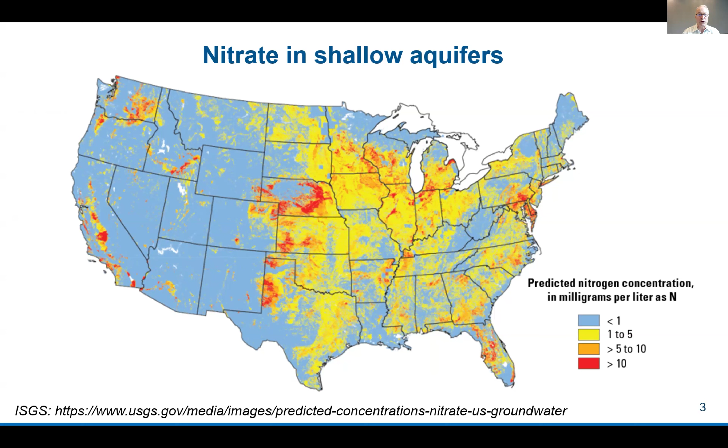All right, so we're talking about a major problem that is across the United States: nitrate contamination in shallow aquifers. Nitrate contamination is most often a result of fertilization for agricultural districts, and it is becoming recognized as a major health hazard, specifically for rural communities across the United States.

In California, we have thousands of groundwater wells. Many of our smaller communities utilize groundwater as their sole source of water, and we can see several thousand of these wells in the SAFER database that are above the MCL. When we look at small water systems with up to 50 connections or up to 20 connections, you can see the many, many hundreds that are at risk or failing right now. An interesting point when we look at the distribution, and we don't think this is unique to California, is that a lot of these small systems facing great difficulty with nitrate contamination tend to be clustered.

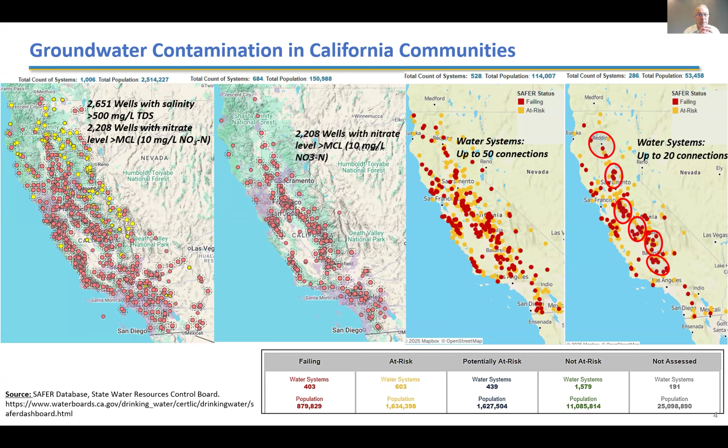And so we'll come back to that. It's a very important theme.

Next tab, Yoram. And then, of course, there is salt. Now, when Yoram made this figure, I was kind of startled to see that normally when we think about desalination and reverse osmosis, we think about taking seawater, 35 grams of salt, and converting it to fresh water. But in California, in inland California and coastal California, we have vast amounts of brackish groundwater where the salinity is too high for us to use for drinking water or for some agricultural purposes. And then look here, even the Colorado River water is 700 to 1,000 milligrams per liter. So salt is part of our water system.

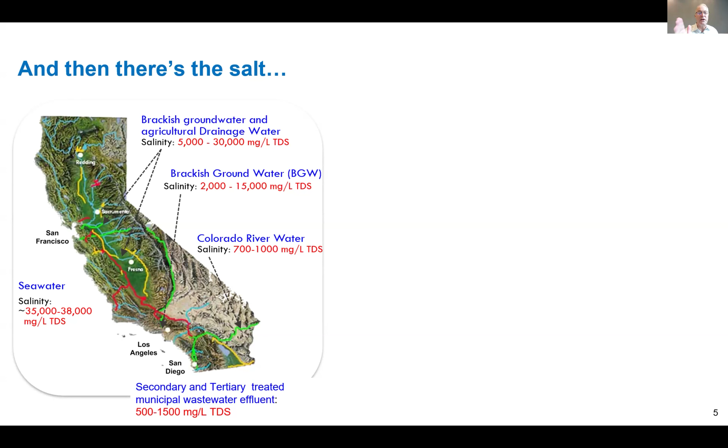And into this challenging situation comes none other than Dr. Yoram Cohen. Next. Here pictured before his appearance at the 1981 Zoot Suit riot at UCLA.

Professor Cohen has been a landmark figure in desalination across the world, and we were so delighted when he and his team approached NAWI in 2021 with a proposal to build on a project that had previously been funded by the State Water Resources Control Board under Proposition 50.

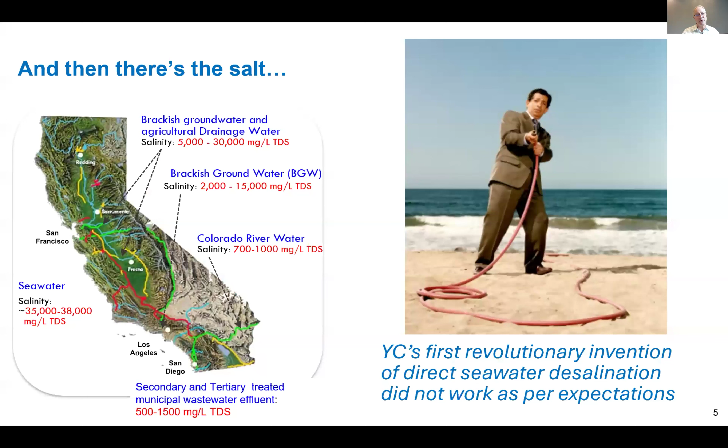Yoram, welcome to the program, and tell us, I'm going to tell a little bit more. Thank you. No, keep going.

One of the reasons why we were so eager to get this project funded was our 20th century water systems are really marvels of engineering, design, and construction. We have large-scale centralized treatment and centralized distribution, and that works great, especially for urban communities, and that's where the bulk of people live.

When we get into agricultural basins, we tend to see smaller communities, and they have a dual challenge of having smaller populations and lower economic base. So they have a difficulty in operating sometimes more advanced water treatment. And as we said before, a lot of these basins are challenged with nitrate contamination, as well as a host of other naturally occurring contaminants or other agricultural products.

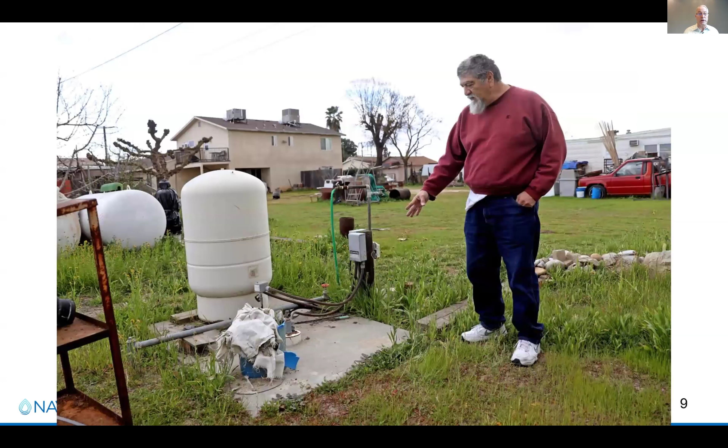The issue is particularly acute for small and very small agricultural communities, in this case, clusters of small workers clustered together. These communities are the lifeblood and the backbone of our agricultural production in California, and yet they're least well served by the current centralized water treatment systems. Their communities typically are clustered around an individual water well, often a shallow water well, and these are the sorts of wells that are most vulnerable to nitrate contamination as well as other contaminants.

And as I said, into this challenging situation came Yoram Cohen and his team.

Yoram, let's talk about small systems for a second. So walk us through this slide. Yeah. So basically, Peter, I mean, we are very well versed and used to centralized systems that serve large population, industrial centers, and also somewhat smaller satellite systems that are also, in many respects, centralized for their small population center. But on the other extreme, we have small communities that are not part of a centralized system, either water treatment or sewage treatment. And therefore, those communities kind of fall in between the cracks, and that creates a real problem. They don't have the person power, the technical ability to really take care of their own small system, or they may not even have a water treatment system in their locality.

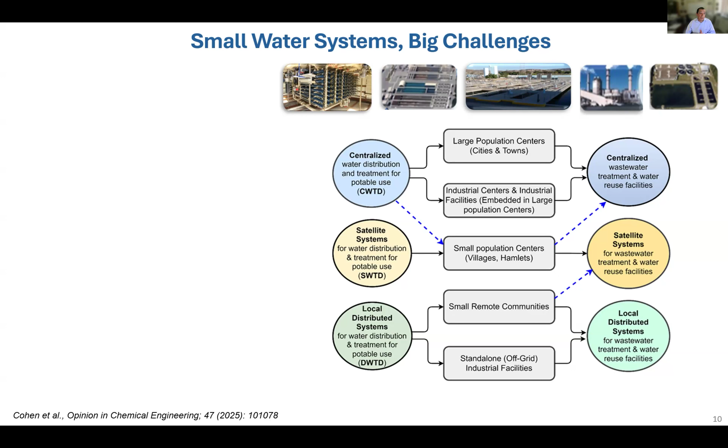So there are challenges, and the challenges for those small distributed systems would be obviously the cost. They need to meet drinking water standards for potable water, and it's important to avoid interruptions in the delivery of water. Those systems have to be able to operate 24/7, whether they operate continuously or intermittently. And therefore, there's also the issue of management of the treatment residual. If we treat this water using standard technology such as RO or NF or even ion exchange, we have to deal with residual streams. So that creates a challenge. And of course, as a result, there are also regulatory requirements and constraints that will impact the operation and the cost. So those are the challenges that we are faced with, and the important need to really help those small communities that cannot help themselves.

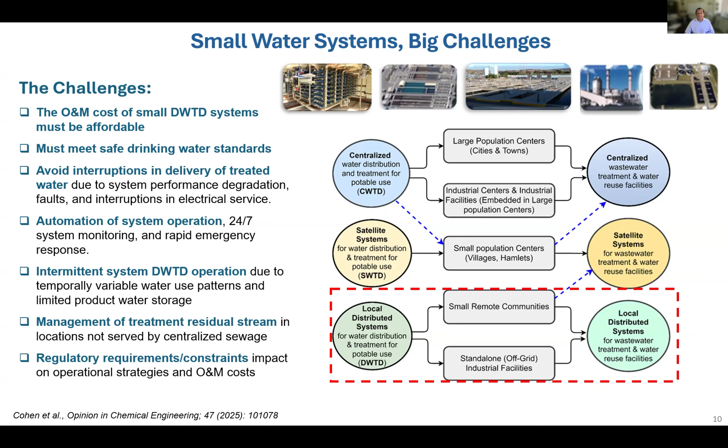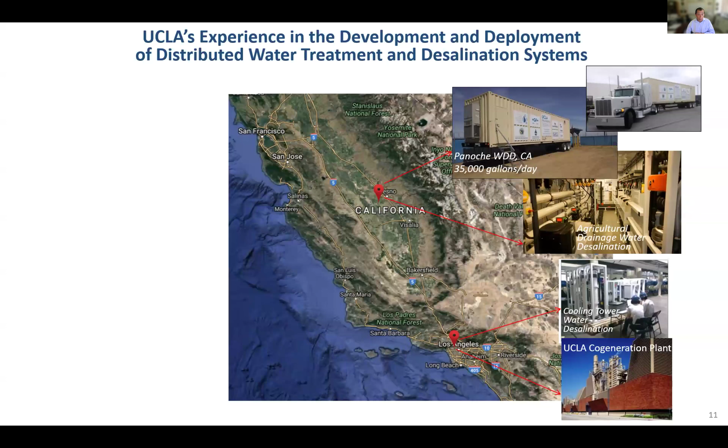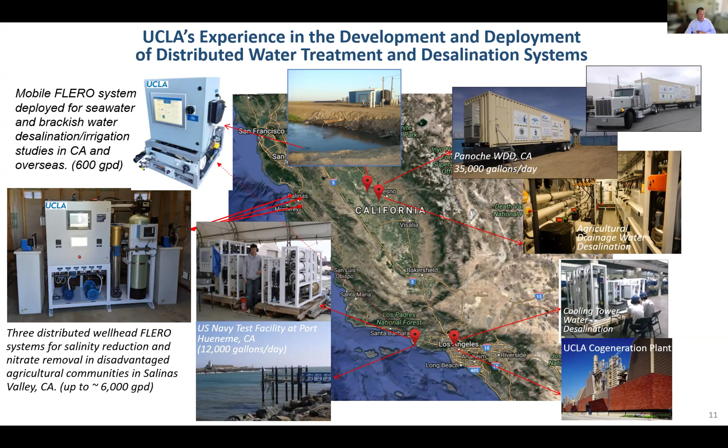So from that, the systems that I'm going to talk to you about today were born out of that experience and a lot of headaches over the years. We approached a number of communities, and I'll tell you about this story in a minute, but I thought it would be useful to show you right here.

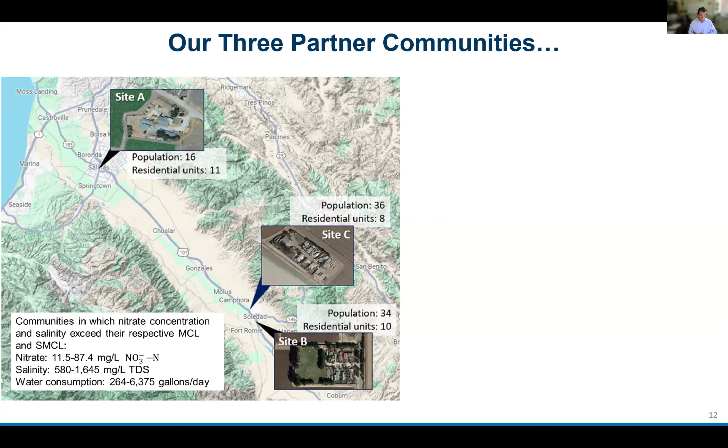Those communities that we selected for this project are between Soledad and Salinas. Fairly small communities, from 16 to 36 residents, and their water is contaminated with nitrate, in two of the communities up to about 6 to 8 times the allowable limit, and the salinity is above that of drinking water secondary MCL. Their water consumption is between 200-300 gallons per day up to about 6,000 gallons per day. So those are the things we have to work with.

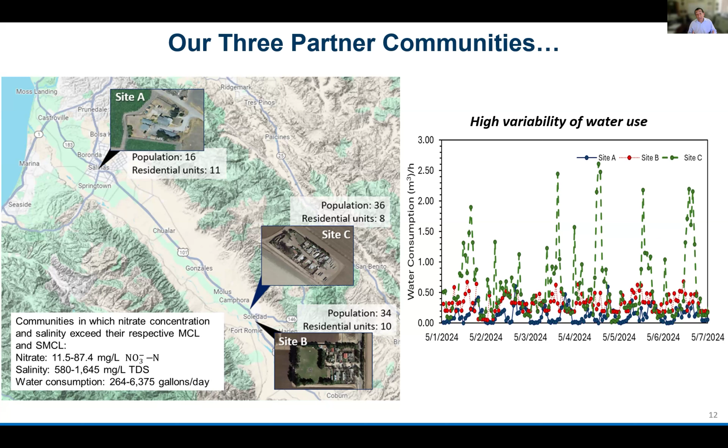One of the things to realize immediately is that water usage is temporally variable, as you can see in the plot here for 3 of the sites. So when you design a system and its operation, you have to take that into account.

With that in mind, the thought about what one would do to treat water in these communities is as follows. You have water from the well for the existing water system in those communities. It goes into a pressure tank, and from the pressure tank to the residential units, and the sanitary water from the residential units is then discharged into a septic tank.

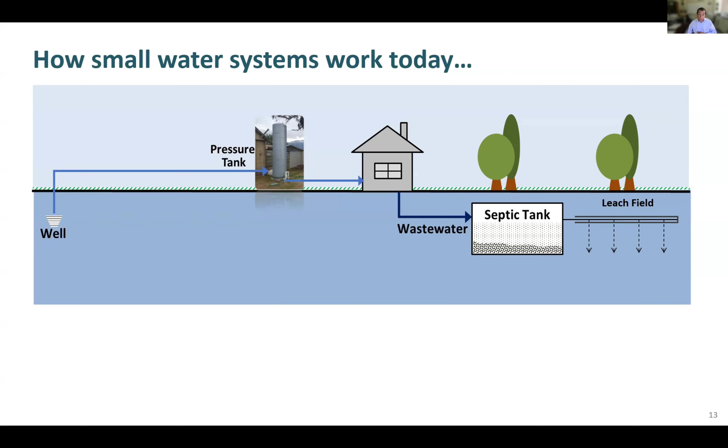In the septic tank, under anoxic conditions, nitrate that enters is denitrified to nitrogen that is then released, and the ammonium released to the leach field can then lead to formation of nitrate.

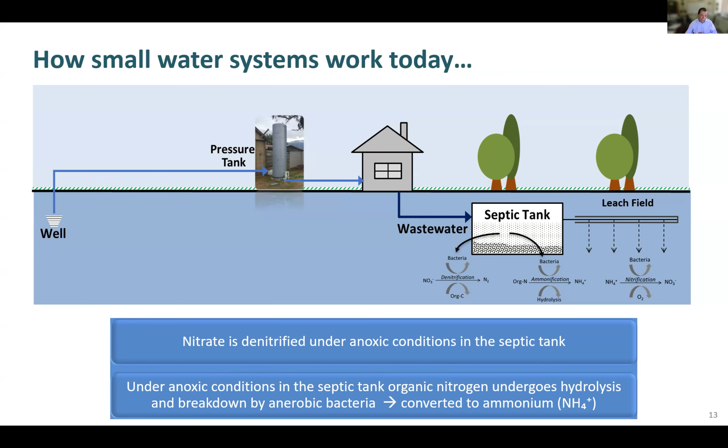So now the question is, if I have nitrate in the well and we are removing this nitrate, what happens to nitrate in the septic tank? Although there is science to indicate what I just told you, this was an important element to prove, and I will cover that as we move forward.

So the treatment approach is you put in a treatment system, in this case an RO system, between the residential units and the well. Water is treated, and the product water is then used by the community, and the concentrate will end up in the septic tank, as will the sanitary water. So basically, we're taking the raw water, splitting it into two streams, and then combining them together.

The argument here, which is important from a regulatory viewpoint, was to prove that we are not making things worse in the septic system, because the nitrate will be denitrified. So in fact, we are cleaning the water.

The fact is that all the nitrate was ending up in the wastewater in the first place. Now we're simply taking the nitrate and other contaminants and bypassing the people in the house. It's a simple but very important concept: we can take those pollutants and keep them away from people.

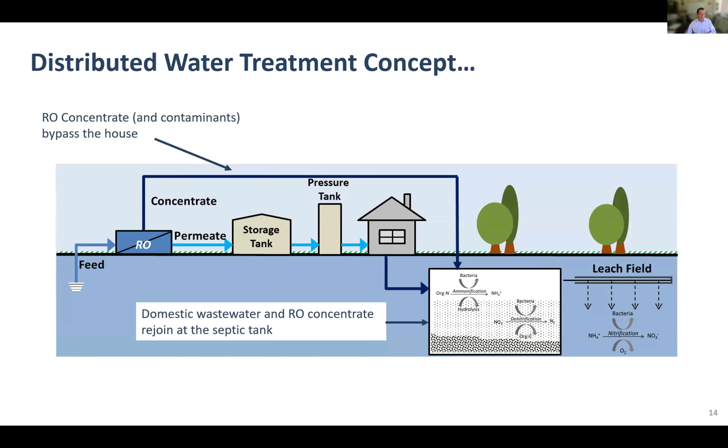And so, Peter, what we forgot to tell the audience is that this presentation will have the form of basically a podcast. That's right, you and I are going to be talking through this. So we already covered that point, and now when you work on this project and put it together, of course you have research questions.

The important research question is: can small scale systems provide safe and affordable water? And how will they be managed, maintained, and operated? Is the technology good enough? What is the actual capital cost and operating costs? Therefore, is it a viable or affordable solution appropriate for small communities in California?

Based on this question, the project goals were to start with a single system, expand it to 3 systems, and that's where the involvement with NAWI came into play, as to how do we expand it to 3 systems and then manage them as a network, get the actual cost involved, and refine strategies for increasing system reliability, remote monitoring, and develop soft sensors that are really critical here, which we'll cover in a few minutes.

And of course, ask the question, or try to answer the question: is it feasible to expand the automation and cyberinfrastructure for these systems to let it grow to a much larger network of systems, or as we call it, a virtual water district?

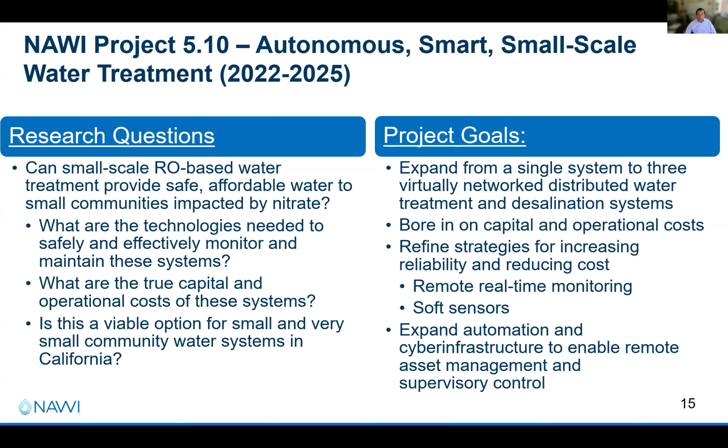What I should say is, when we started with this project, we did not have AI, we did not have the level of cloud services that we have today. So things have obviously evolved over time.

What's important in the project is to work with project stakeholders: the property owners, the residents, state and county, the various water boards, even the building departments in the county, and various representatives, and to work with non-profit organizations, including arranging for replacement water for the communities while the project was still building, and to work with other groups in order to communicate with the residents and to build trust. And of course, it wouldn't be possible without the support of NAWI, the Department of Water Resources, and all the students, the postdocs, and the contractors that worked with us over the years.

And last but not least, the Lawrence Berkeley National Laboratory, which has made a major contribution in assessing not just the life cycle analysis, but the potential impact of such a system on emission of greenhouse gases, and how we can reduce energy or electricity costs.

So community outreach is critical. I won't belabor that point, but we've been at it from the very early stages of the project, selecting the communities. We toured the entire region and talked to many different communities to identify those willing to work with us, but also those where we could answer their questions and build trust.

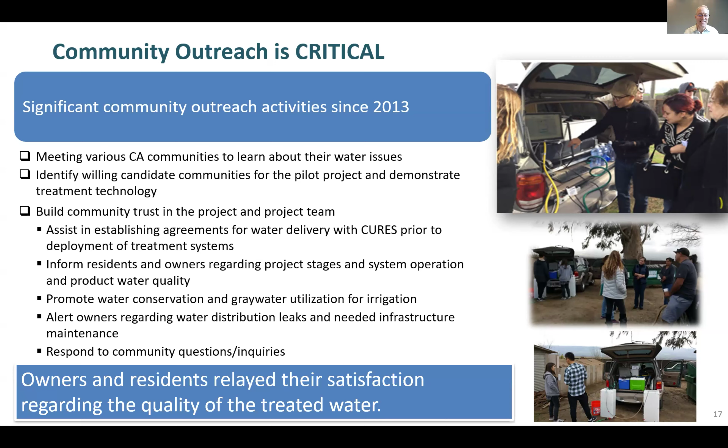The major element of the project is to install, operate, and of course measure on all aspects. This was key, and we will talk about that.

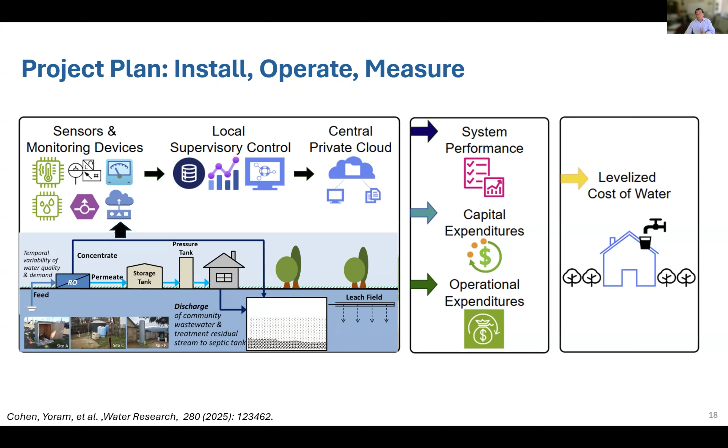The main component is to do the technological work, develop the system, deploy it, have all the sensors, controls, and the central private cloud for monitoring those systems, to get all the information we need in order to determine the capital and operational expenditures, so that we can arrive at the levelized cost of water.

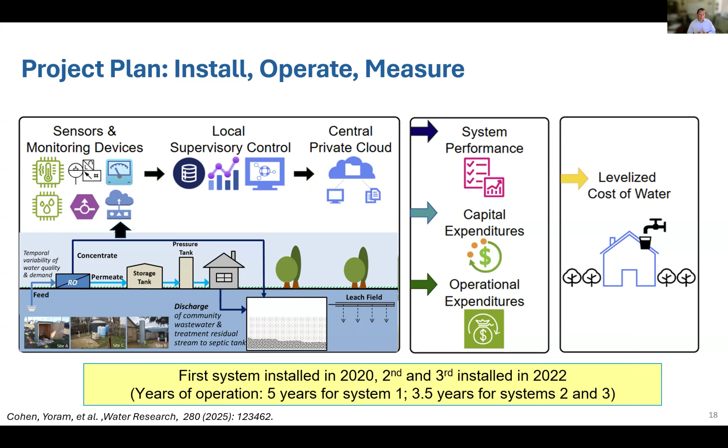Just to remind you, the first system we installed was in 2020, the second and third in 2022. So systems have been operated for about 3.5, now almost 4 years, 4 to 5 years, which is a significant period.

I know everybody is gung-ho on learning about water treatment, but before you can do water treatment, you have to make sure the site infrastructure is properly done. Those of you who have built your own homes would know what is involved.

Since I've had experience building multiple homes over the years, I thought no problem, it'll be easy to do, without realizing that the regulatory aspects in that part of California were going to be a big headache. But we were able to do that.

You can see the work done on site: the piping, the trenching, and all the storage tanks. One important thing is that we installed a septic tank sampling basin in order to prove that there is denitrification ongoing in the septic tanks. And that had very important implications that you will hear about shortly.

So I already mentioned there was site investigation, community engagement, getting all the appropriate permits, and of course designing the system layout, all the electrical, the plumbing, and working with the contractors to do that. And ultimately, once that is done, then you can install the treatment.

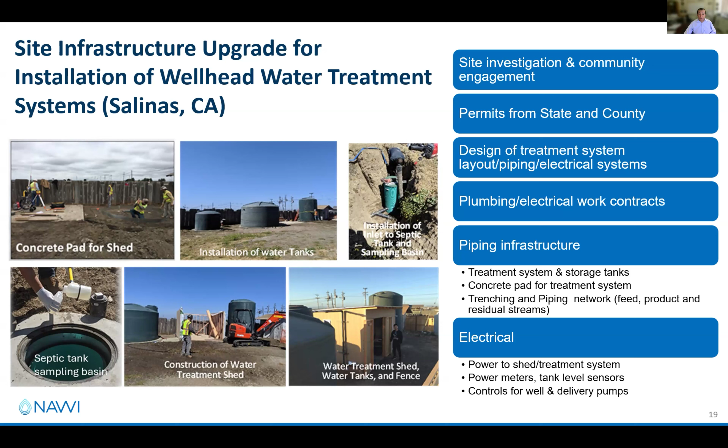Let me emphasize here, this is one of the important aspects of this project: UCLA did or oversaw all these works. So UCLA had all the receipts, which meant we could do a very accurate capital cost. Our analysis doesn't just include the cost of the parts, it includes all the aspects of siting, installation, etcetera. That is important, especially approaching a new community, to be able to inform them as to what would be involved and what the cost would be.

So now we're getting into the actual treatment system. I'll show you a simplified view of it. Basically what happens is we take water from the well into a feed tank, then into the treatment system, the RO. However, what we have is a recycle of the concentrate in that system, and of course the concentrate portion will be discharged to a septic tank.

What I'm not showing you here is that only water that meets the regulatory limit is diverted into the product water tank that you see here. Once it's in the product water tank, another part of the system, which we also have to take care of in terms of all the controls, is delivering water to the community when needed.

They use a pressure tank — those are bladder tanks — in order to build the pressure to deliver the water to the distribution system. So once there is a need, once the pressure is at a given level or below a given level, then the delivery pump would push water into those tanks.

Beyond the RO system, you also have to take care of and satisfy all the regular requirements for drinking water in California — adequate chlorination and holding a residual disinfectant. You also test to make sure you're not liberating copper or any lead from the system, following essentially all the regulatory requirements of a public drinking water system, in addition to bacterial tests to ensure the water is safe.

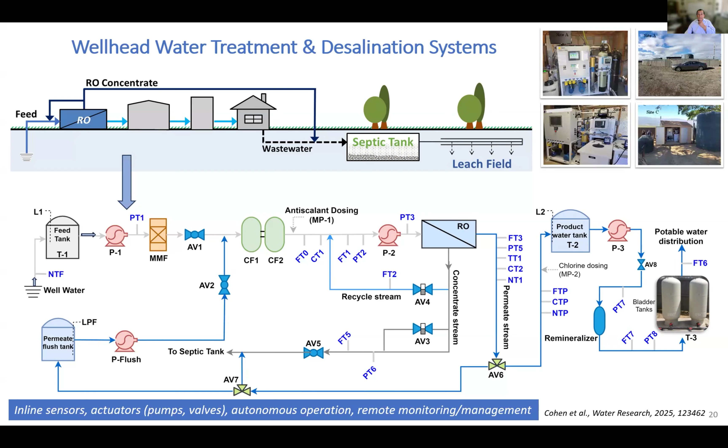Now let's move forward and say the system is completely instrumented. There are roughly about 33 sensors in that system, and when we look at the operation of the system, those are the different sensors for conductivity, temperature, flow rate, pressure. This becomes very important when you look at the distribution. It's normalized here because, as I'll show you later, we use one system to learn about the operation and then apply it to another system.

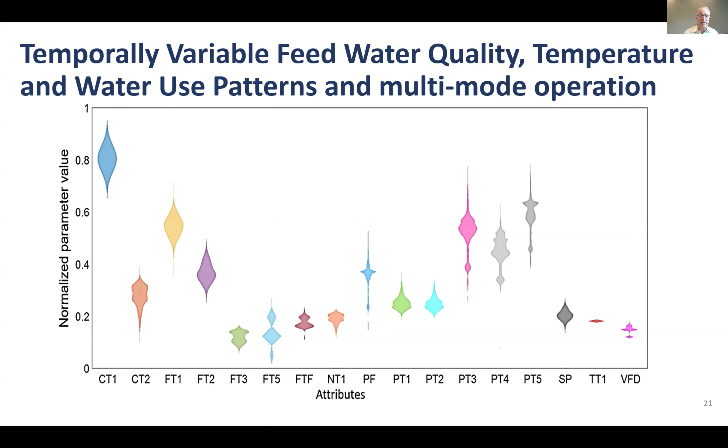Let me point out, this diagram shows the range of each of these parameters. It shows that these small systems actually experience much wider ranges in a lot of these operational parameters as the water's going through the treatment train. That's critical to understand as we develop the platform technology.

Very quickly, this is just a screenshot of the web dashboard for one of the systems, so we can actually look at the system in real time. If we click on any one of those sensors, we can see the current and the history — in this case the nitrate level, or if we look at the permeate flow rate, then we can get the history here. You can see there are breaks in here because the system operation is intermittent.

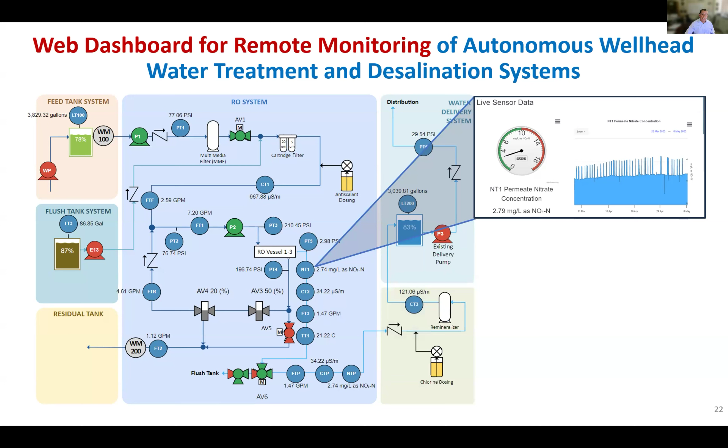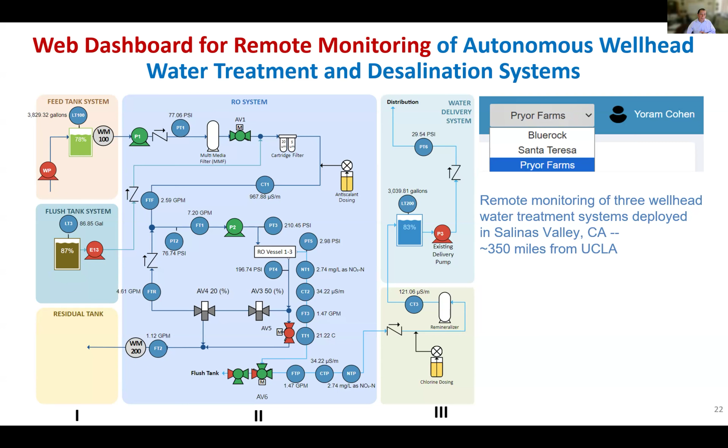But what I want you to see here is that when I talk about a treatment system, it's actually three components: there is the entire feed system, cleaning the system through flushing with permeate, but there is also the distribution system and the post-treatment of the produced water. Chlorination was mentioned, but there's also remineralization in order to stabilize the pH and put calcium back into the system. So we can not only operate the systems individually, but also look at them collectively via a web dashboard.

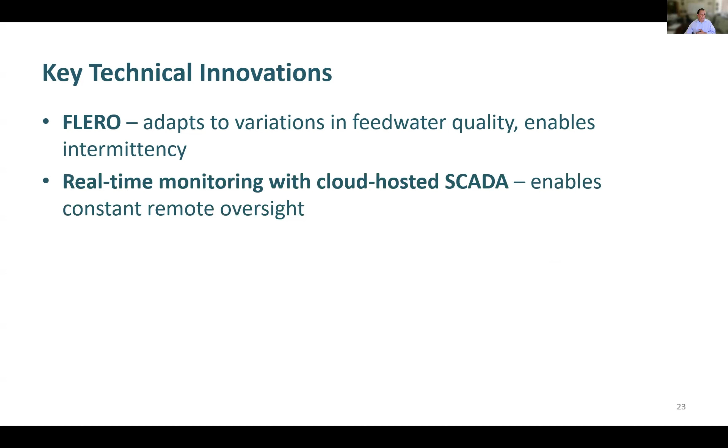So the main technical elements here, which I will cover: the FLERO system, which is the actual RO-based system; the monitoring, which I've already described; nitrate passage analysis; and sensor development. I will mention that briefly.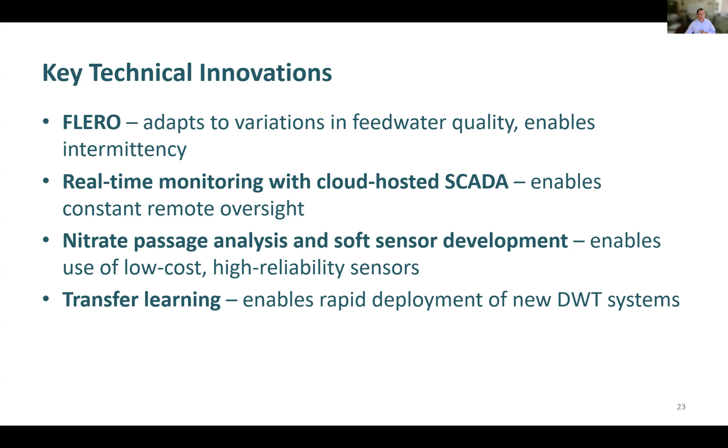And of course, transfer learning, which was really important for rapid deployment and shortening the commissioning periods.

So the FLERO system, flexible RO. Basically, the idea a number of years back, before we started with this project, was how can we reduce the size of a system and still allow us to have a very high level of flexibility in terms of covering a wide range of recovery.

In this particular system, the concentrate is recycled back to the feed. When we want to reduce energy consumption and also reduce the ratings for the feed pump, one can insert a pressure intensifier, which transfers pressure energy back into the feed and depressurizes the concentrate, which then feeds into the feed side of the pump. And that gives tremendous flexibility in terms of system operation.

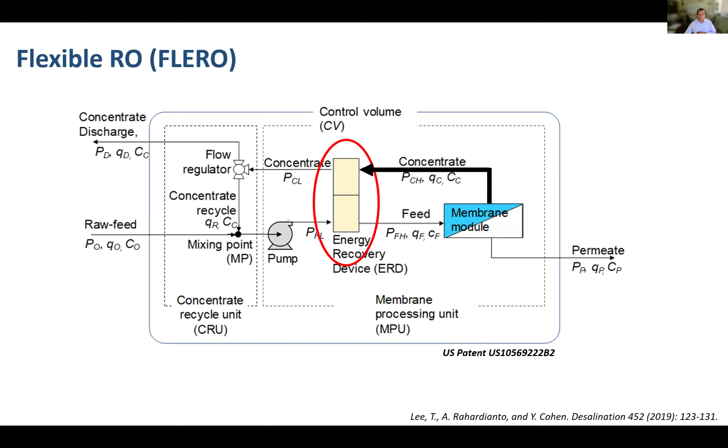As a result of that, I'll try to go through this quickly: the system overall recovery is just the single pass recovery times 1 plus the recycle ratio. In this particular case, we can operate whereby the normalized feed to the elements is essentially the same, a normalized value of 1. Then we have the concentrate, and we can vary the recycle flow in the system by readjusting the recycle flow.

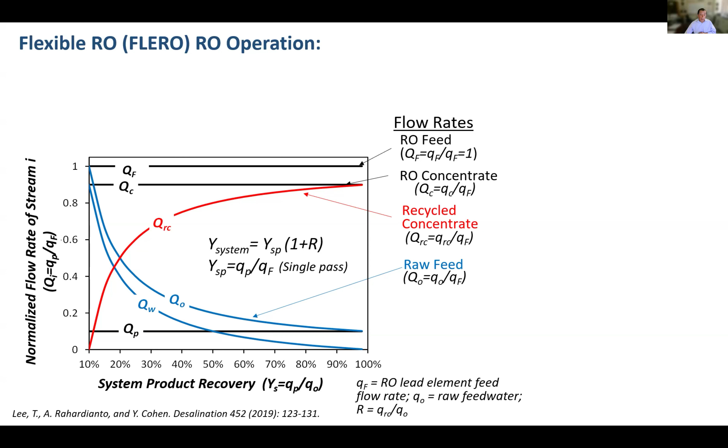We can therefore also see that the raw feed can be adjusted, and the permeate productivity can be maintained. Here I'm showing you going all the way to 100. Of course, this isn't feasible because of issues like buildup of osmotic pressure and mineral scaling, but the point is that with this system, you can operate over a very wide range of salinities, here shown for just one system, going all the way from seawater to very low brackish water.

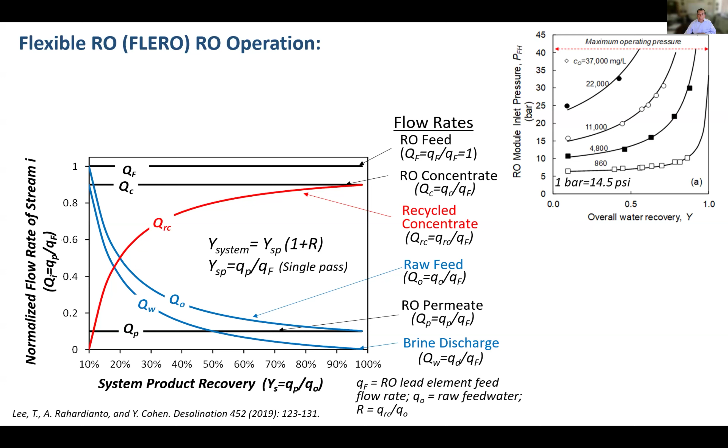The key is that whatever the inlet pressure required for the elements, we can utilize a pump of much lower pressure. So in this case, you're seeing 30 plus bar pressure needed for the RO elements, and that can be achieved with a pump that delivers only about 6 bar pump pressure.

Let's talk about this a second, Yoram. So the key element and key benefit of the FLERO architecture is you can use one standard platform and address a wide range of incoming water quality, and you can also adjust, like a throttle, the production rate by the fraction that you recycle in the system. And as you said, with the small energy recovery device, you can use relatively low cost, low pressure pumps, and yet pressurize the concentrate and boost it. So it really means you can use one standard package and apply it in a bunch of different environments.

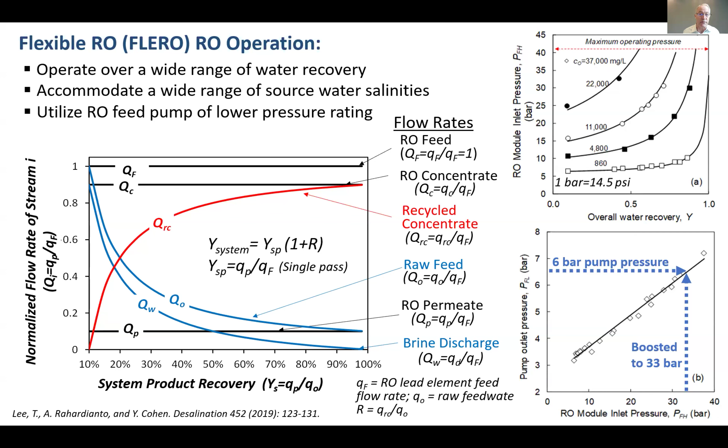That's really key. True, and it's also important, Peter, to realize that those communities may grow or decrease in size over time, so their water consumption may change as well, and water quality may change. So all of that becomes relevant.

And in fact, Yoram, you have some of these communities that are very seasonal, so you might have only a handful of occupants during some of the year, and it might swell. These are some of the practical challenges when you get to small systems with a relatively small number of households - you can't average it over a large number of households.

Anyhow, for those of you that like complicated figures, there's one on the left. I'm not going to go through it, but basically this is a pictorial representation of the overall cyber infrastructure for the systems. The main point I wanted to make is that in terms of operations, we've delivered about 7 million gallons of safe potable water to date.

And those systems have provided an incredible amount of data - roughly about 90 million data samples, each consisting of 33 input sensors and process tags, which translates to over 3 billion data points.

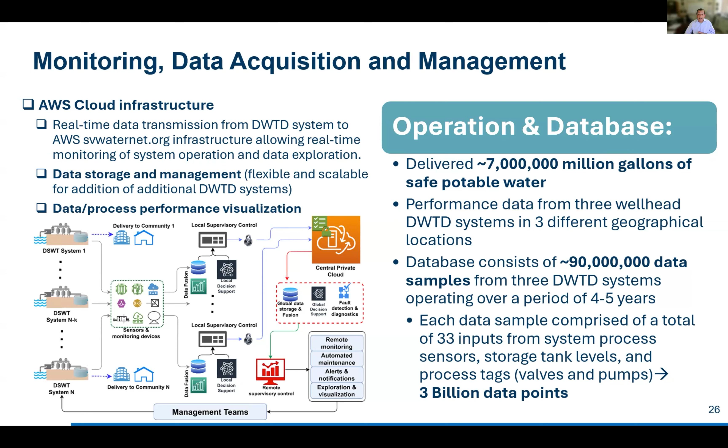It becomes critical, absolutely. So we get data every 2 to 5 seconds from the system. Now, this is important when you're developing models to describe those systems and to provide soft sensors.

Let me just stop you right there, because I know we have technical and non-technical people watching. In order for these systems to work, you also have to build a computer model that predicts how the system performs, because then you could always compare your actual numbers to what the computer is predicting.

But in order to build that computer model, you need a large volume of data, and that's what we've developed here. Also, Yoram, explain about the 4 modes in which this system operates.

Because I showed you at the beginning that the water use pattern is variable, the treatment system does not work continuously. Also, you have constrained storage. So if we have a storage of about 5,000 gallons, once it's full, the system has to stop. And so there are modes where the system may be shut down, and for various reasons, we don't let it work more than 10 hours. When it works for 10 hours, we shut it down, we flush it, and then start again.

So there is a shutdown, a permeate flush, and then a startup when the system has to start, and then you get to production. Other than production, all those periods are short, but very important, because you don't want to basically deliver water that doesn't meet the regulatory standards during any one of those periods. In other words, during startup or shutdown, you don't want to squirt a little untreated water through the system.

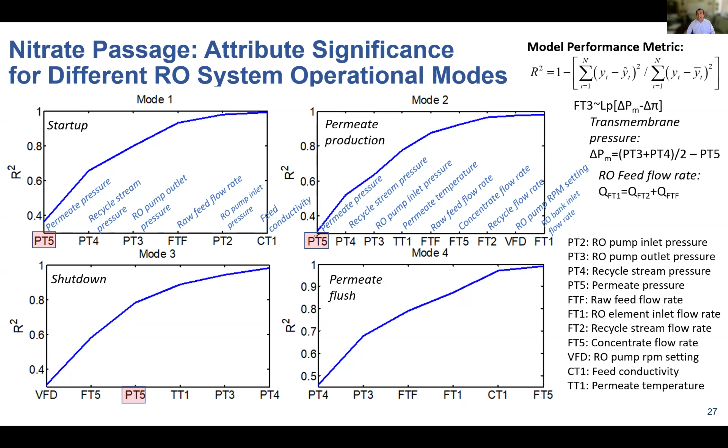Here you see some of the variables — pressures at different points, flow rates, conductivity — for the startup, and then for the second mode, which is permeate production. You see there are a few more variables there, and that the different modes share some of the same variables, but they're slightly different. For those of you interested, I'll be happy to talk more about the mechanistic reasons for all of this.

When you look at the system, there is a system startup, which is fairly short — about 90 seconds. Then there is a production period, operating for about 8 hours or so. Then there is a shutdown period, about 1 minute to shut down, and then the flushing period.

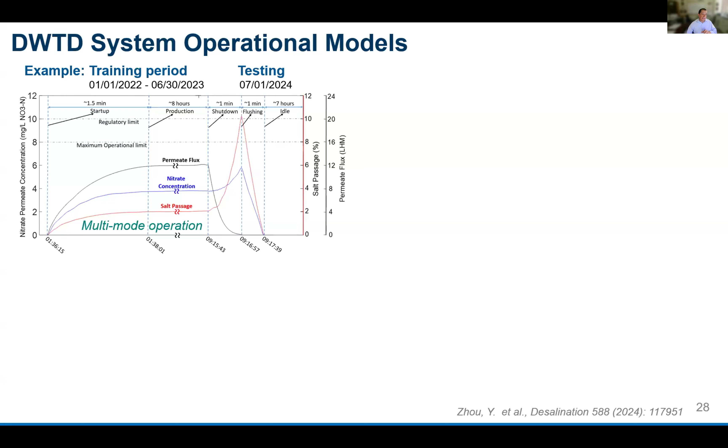Those periods can change slightly because we monitor the quality of the water during startup, and we only go into production once the water quality is met, so there can be slight variations. But one of the things you see here is that during shutdown, there is a spike — at the beginning, there's a spike in the salt concentration and a spike in the nitrate level.

In fact, over many cycles, as I'm showing on the right — predicted versus observed — what I want you to see is that there are spikes in the nitrate level that approach, and in some cases actually overshoot, the regulatory limit. So the regulators have asked us to set 8 milligrams per liter of nitrate as the operational limit, even though the actual regulatory limit is 10.

Why? For safety. And so that becomes important. So what happens during those periods of spike where the product water is above that 8 milligrams per liter?

That's a good question. During that period, the water is basically diverted into the septic system. It's just for a minute or less — a very small portion of time that the water gets shunted over there. In our experience, it can sometimes go up to 3 minutes, depending on the situation. So that is important.

Also, why is it that we need to model? It's because we want to know what is the longest period to expect for the startup and for the shutdown, so that in the event a sensor fails, we will use a conservative approach.

Now, at the bottom, you see basically what are predictions of the observed versus — for all of you who are not nerds in the audience, when you see that diagonal line, that shows you that the prediction and the actual reality are highly correlated, and that R squared, for those who don't remember statistics, shows you the degree to which the two are matching.

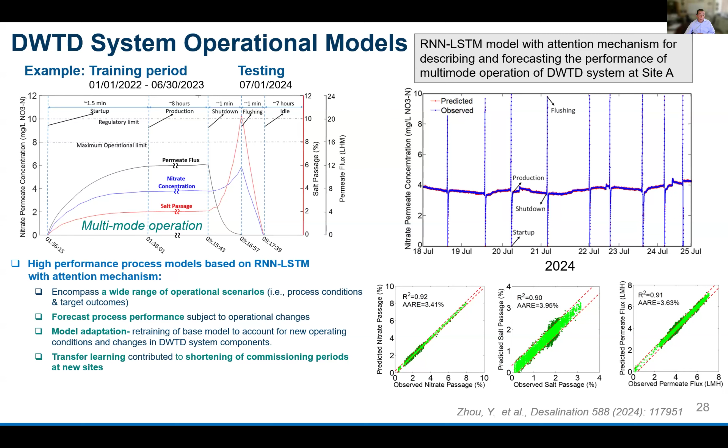Now, of course, when we do that, we have to realize that we have multiple systems. So you build a model, you've calibrated the model at one site. The next innovation is about how do we take that model and adapt it to the next site down the road. This is critical.

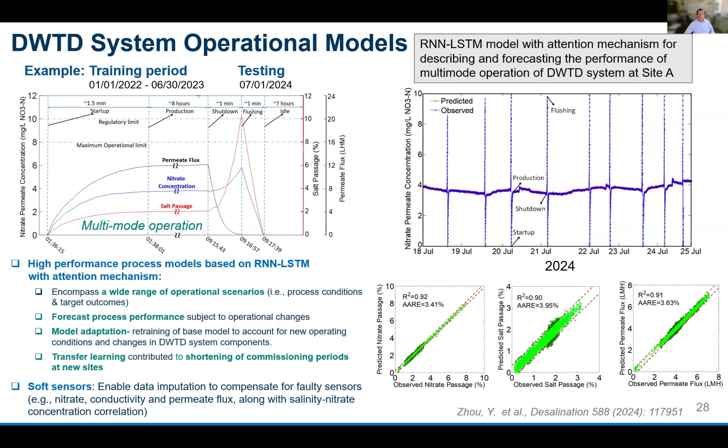Now, you may ask, why would you even want to do that? Well, our initial commissioning period was about 6 months, maybe a little bit longer, with all this testing and sampling and more testing and more sampling. And that is very tedious, but also very costly. So we thought, is there a way to accelerate this process?

If we can show that we can forecast system behavior, and that our forecast meets reality - this is why this is so important. If you built a new system from scratch with a different design, you'd have to go through that all over again. But when you use the same standard platform, you could take the knowledge set built on one site and move right down the road to the next site and get up and running.

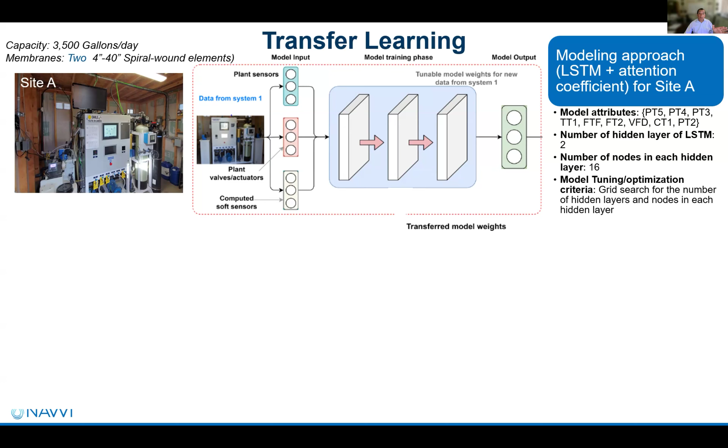So here, basically, this is one site. Site A actually is in Salinas, and then we develop a model, and then what we would like to do is transfer this model to a site near Soledad. The difference between the systems is slightly different in capacity - one had 2 spiral wound elements, the other had 3 spiral wound elements.

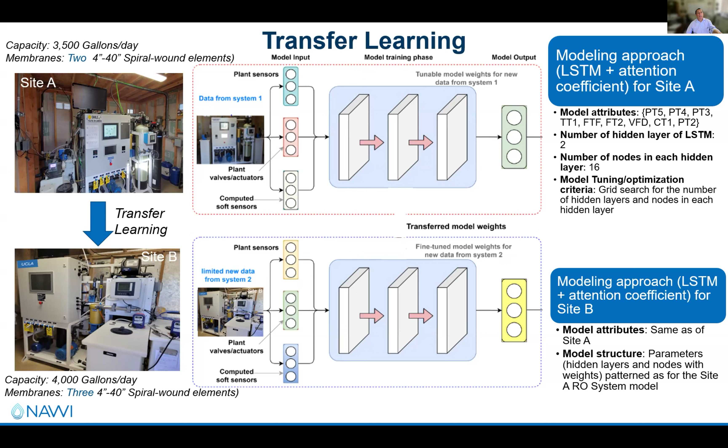So we go through this transfer learning, and basically what it means is that we take about a week or 2 weeks of data from the new site, and we use that to slightly tune the model that already exists from the first site. So what I'm going to show you here is that when we do that - now I'm looking at site B, adding a third site - we start with the initial model forecasting, and you see the R squared of about 0.94.

This is also for nitrate, but you see that we have a decline in the model accuracy. If we don't retrain, model accuracy begins to deteriorate over time. So we're going here for quite a long period, about 365 days - a full year.

So what do we do? We set a threshold that says we will not allow utilizing the model below a certain level of performance, and then we retrain. When that level of performance declines, we retrain again. Roughly, not just from this example but overall, we would have to retrain every 50 to 100 days, which you can think about as a recalibration of the soft sensors.

So in other words, physical sensors have to be recalibrated with standard solutions. Soft sensors, these data models, need to be periodically recalibrated as they drift away from the initial conditions. Yeah, makes perfect sense.

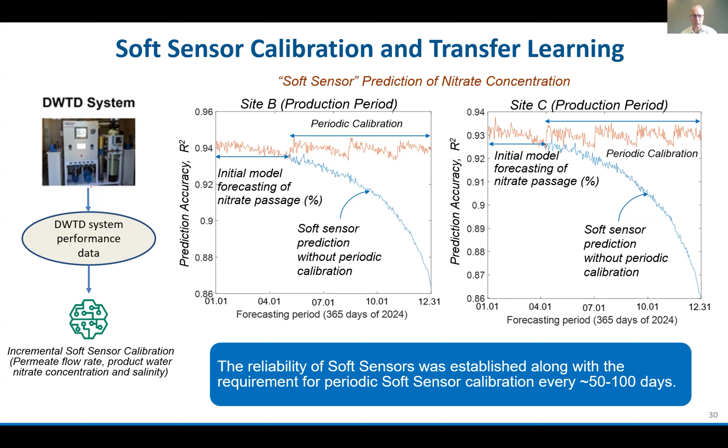And if you ask why do you need to retrain if it's the same system, remember what I showed you at the beginning about the data distribution - it's because if we transfer the model based on data that is, say, at the beginning of the fall, then by the time we get to winter, conditions change, temperature changes, the rate at which people are using water changes, water quality may change. So that's why you have to keep that going.

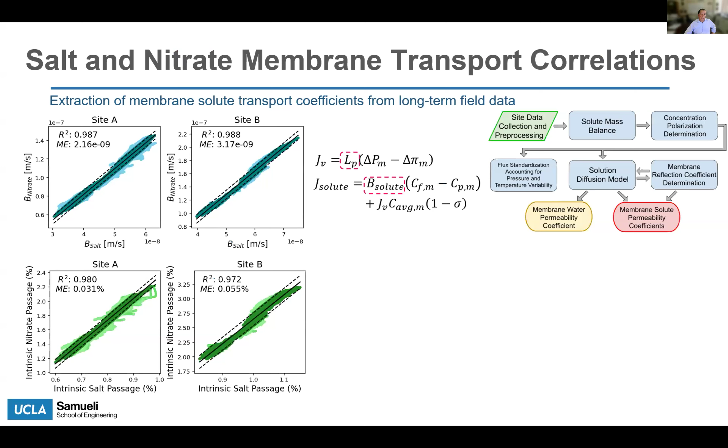So yeah, let's keep going. I know we've got 15 minutes before. Okay, with that in mind, I'm going to basically jump - a lot of technical work went into building what we call a soft sensor, a way of accurately predicting nitrate passage.

So you can see here the key element is that when you have soft sensors, it allows you to do multiple things. One is you can correlate, for example, nitrate versus salinity. So if one sensor fails to work, you can use the other in order to fill in the missing data, or to infer - if the predictions show you that the actual measurements are way off, then you can use that for fault detection.

But there is another important element to this: cost. A nitrate sensor is very expensive, on the order of $10,000 to $15,000 depending on the type. And guess what, they don't work that well either. You have to recalibrate them.

So then you have a conductivity sensor, which is much cheaper. Conductivity sensors are dead reliable. They're a much simpler device, much longer performing. So you're basically using a robust, reliable, simple sensor to infer the performance of something that's hard to measure. A nitrate sensor could be 15 to 20% of the actual water treatment cost, excluding site infrastructure.

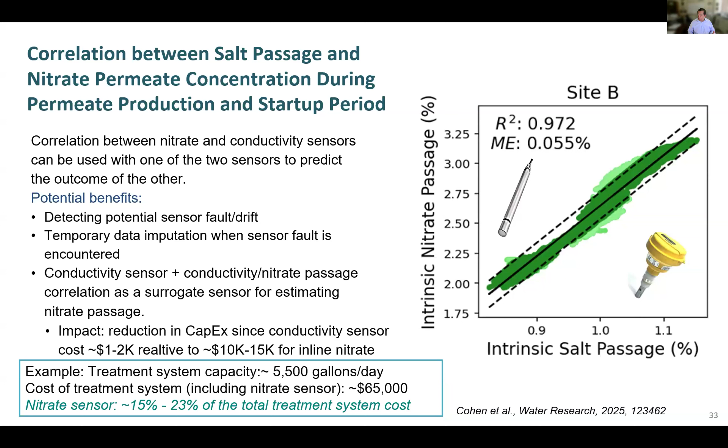That's huge, right? So those are considerations that one has to bring in.

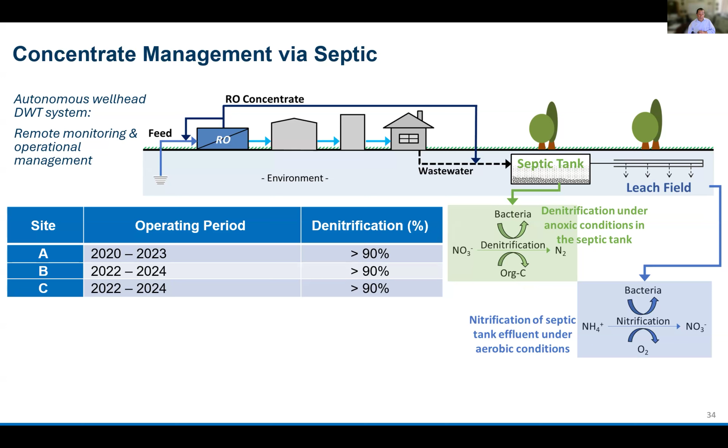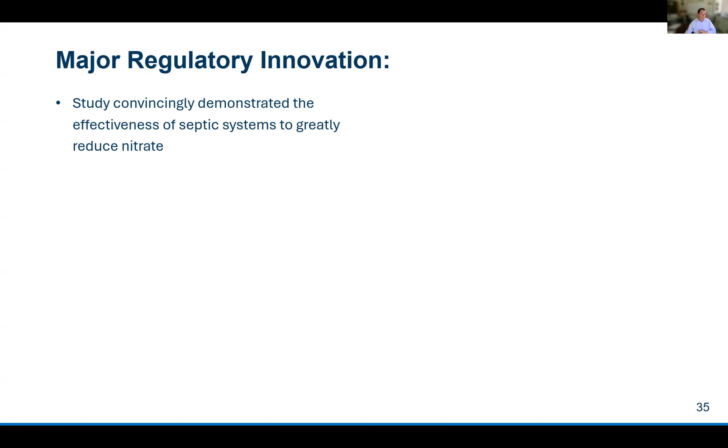So this is the last innovation: concentrate management. Over a prolonged period of time, we determined that denitrification was, on average, 90% plus. We are denitrifying the nitrate that goes in and basically confirmed this. As a result, this study really convinced the regulators that you can use the septic system for accommodating a discharge from the RO system.

As a result, a general waiver was issued by the Central Coast Water Board and supported by the State Water Resources Control Board. That means you can deploy an RO system and discharge into a septic tank for a capacity of up to 10,000 gallons per day without needing a special permit.

You told me this when it first happened and I didn't quite appreciate it, but everybody needs to understand just how profound this is. Reverse osmosis or other membrane technologies produce a brine waste stream that is basically impossible to get rid of. Now there's a safe place to discharge it: into the septic itself. That's a huge unlock, particularly for small-scale systems.

Somebody asked earlier, is that per septic tank? I think it is, Yoram. Yes, so if you had a larger community with two septic systems and two leach fields, you could do 10,000 in each. So that becomes very, very important.

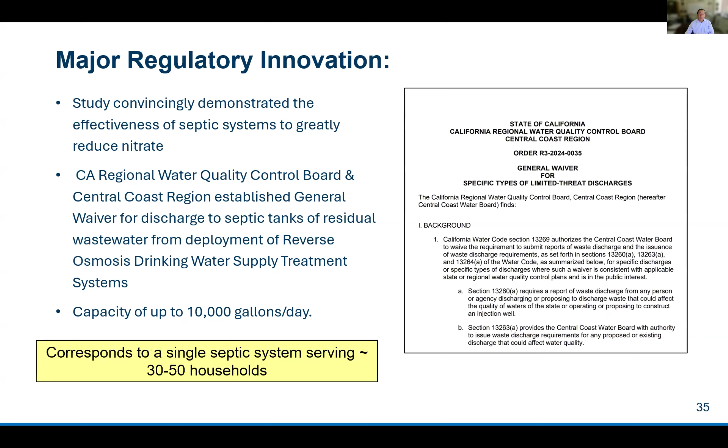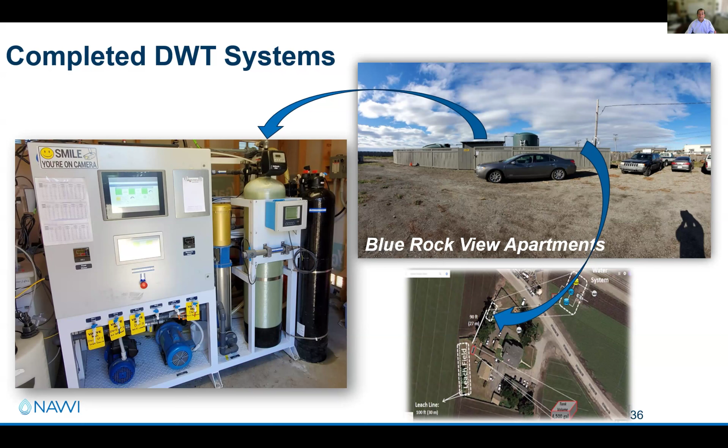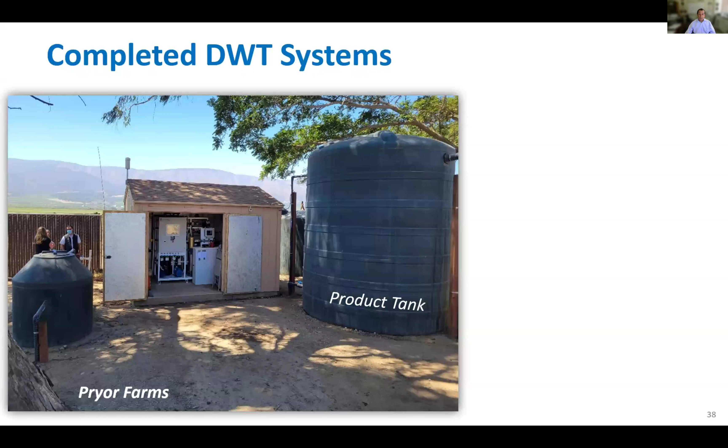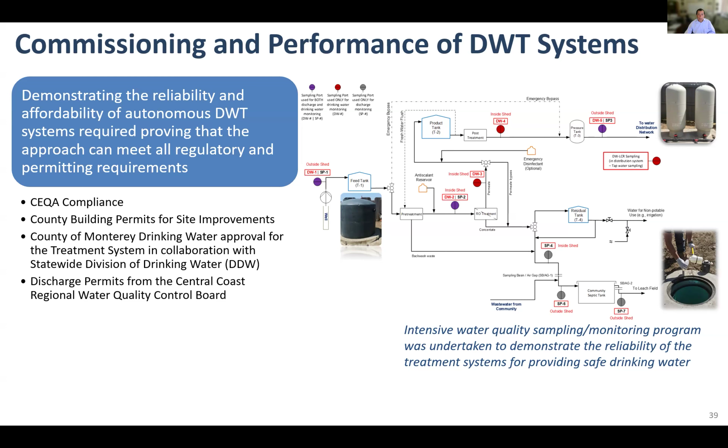Aside from all the monitoring, it was very important to actually do a lot of manual sampling at the very beginning by a state certified laboratory. I won't dwell on this, but you see all the points where sampling had to be taken, including from the septic sampling basins. That's what you need if you want systems approved for delivering drinking water, and that becomes key.

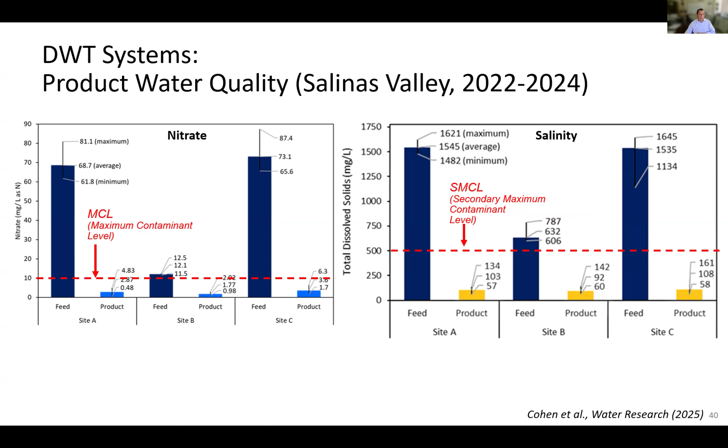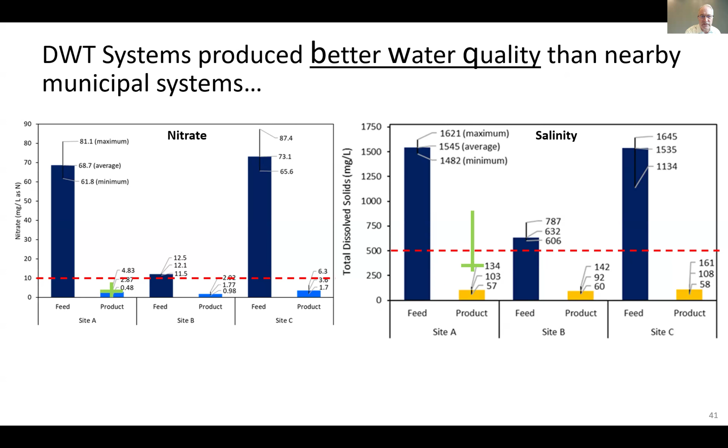So the water that was produced met all the regulatory standards. The key here is that the water was produced with respect to nitrate and salinity way below the regulatory limit. Look at that—those green X's are the water quality for nitrate and salinity for the city of Salinas. So the water we're producing in these three small communities is actually better than the municipal water available in the nearby town. Better water quality, and that is very important.

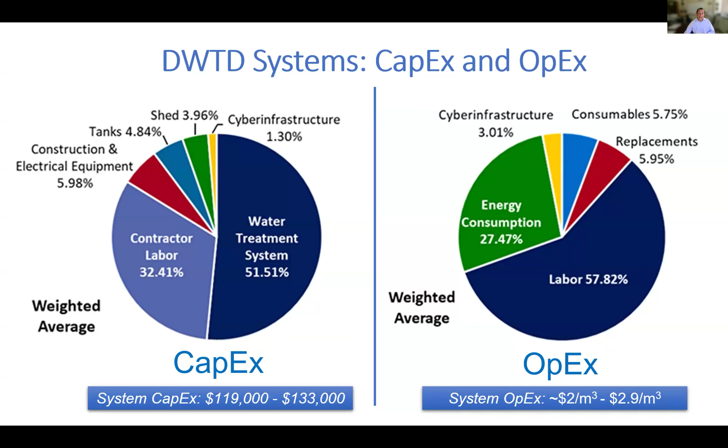Now, how does that compare, Yoram? I'm glad you asked. But before we do that, we wanted everybody to believe those numbers. Those numbers are not taken from any estimates—they are taken from actual values. We designed, developed, contracted, operated, and own those systems.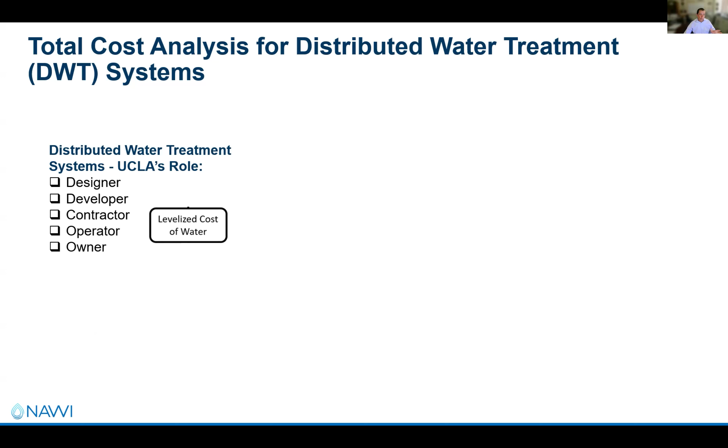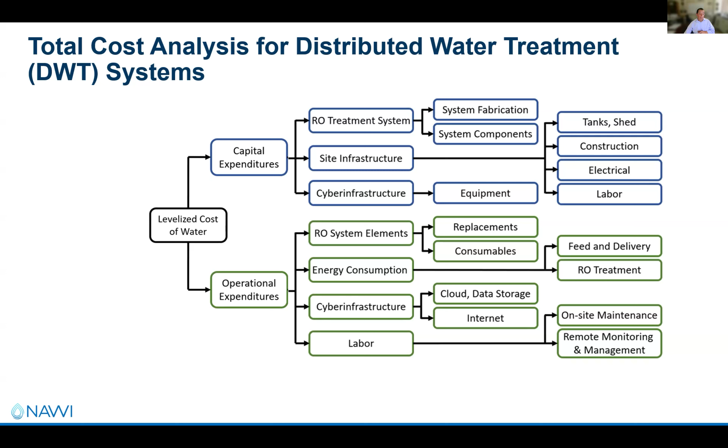So we have all the receipts for the capital and operational expenditures, and of course all the way to site infrastructure and the cost of maintenance and remote monitoring. Aside from that, we don't have time to go over it, but...

LBL, also part of this project, has done incredible analysis to demonstrate that one can decrease energy and electricity costs through optimized scheduling of operation, because there are differences in prices of electricity between night and day. Also interesting is the greenhouse gas emissions are actually lower for wellhead treatment relative to a partial solution that's been used in some places for bottled water.

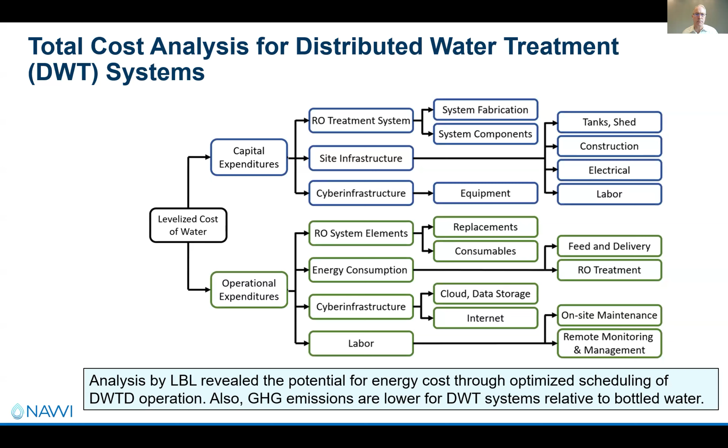No trucks. No trucks. That's great. And here, Peter, okay, so here's the comparison.

Your systems, Yoram, here at the top, are $2 to $3 per cubic meter. In the Salinas Valley, it's $2 to $4 for municipal water. And across California, it's $2 to $6. So this is at the low end of the cost scale.

That's correct. And if you think about consolidation, in some cases the communities are too far away from the closest connection point to a central system. Cost is about $700,000 per kilometer. Steve Waite, who's on the phone, can tell you he thinks that number's off - it's about twice that now.

Yeah, that's a number, Peter, that is cited by the California Water Board, but it doesn't include the cost of planning, administration, connection fees, line fees, and so on, and whatever water costs there's going to be associated with that delivered water.

Right, and of course, bottled water - well, you can look at the numbers. That's absurd, right? In terms of cost, and you're not going to bathe in bottled water, right?

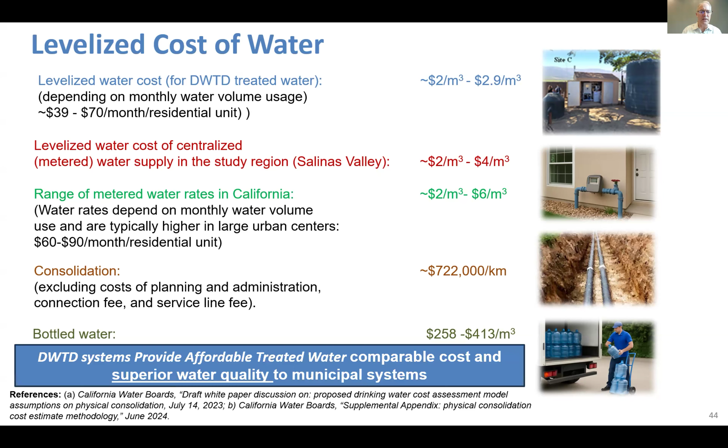Well, we've got 5 minutes. Let's speed to the end here. So we're done. And I just want to tell you that...

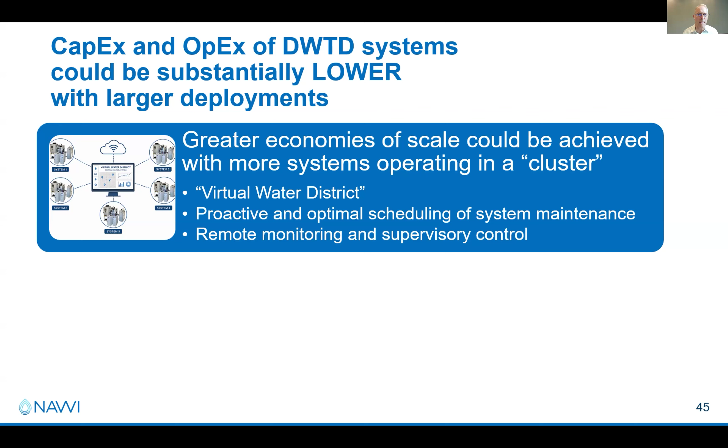The question is whether greater economies of scale could be achieved with a cluster, with standardization, and via design improvement. So basically, we think these costs could be better when you create more of these systems.

First of all, your unit production cost for the hardware is going to go down. You're going to have a lot of learning curve in installation, and then you can amortize qualified operators amongst a larger number of these systems, and they can go around like a milk run.

And how often, typically, is our one operator, Andy, touching these systems? Visit the systems once a month, right? Once a month. Yeah, once a month. Interesting. So that's great.

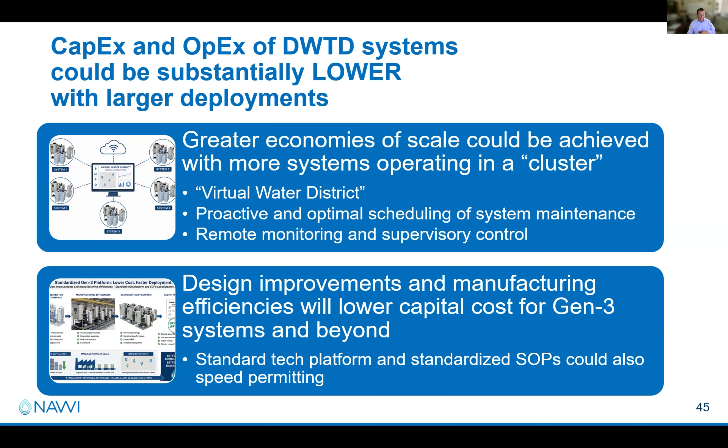With that, okay, let me get to my thing. So, next frontier, Yoram, I want to tab through these. One of the reasons why I wanted to be part of this presentation is that we are really excited by this result. We really think we have an economical solution, especially for these hard-to-serve small communities.

Our next phase is to build a larger framework so we can truly validate the cost and performance of these systems. So we are currently building a plan to do a phase 3 program to deploy 20 to 30 of these systems. We'd love to do it in Monterey and Santa Cruz counties.

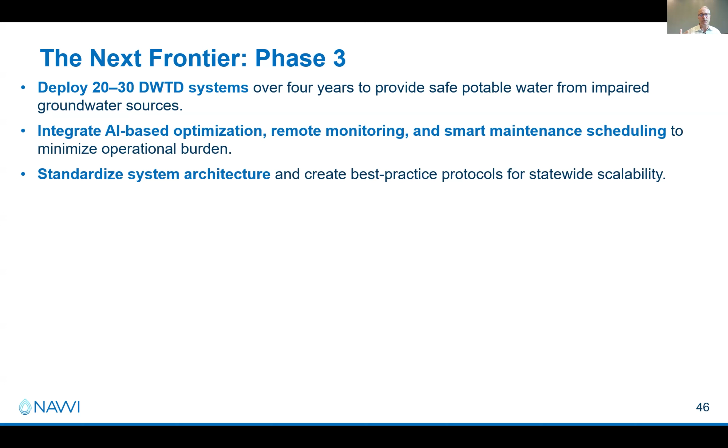We'll improve the AI and optimization monitoring, standardize the system architecture, and we can also facilitate greater community support and capacity building. We can actually have local people learn to use these systems, reducing long-term costs.

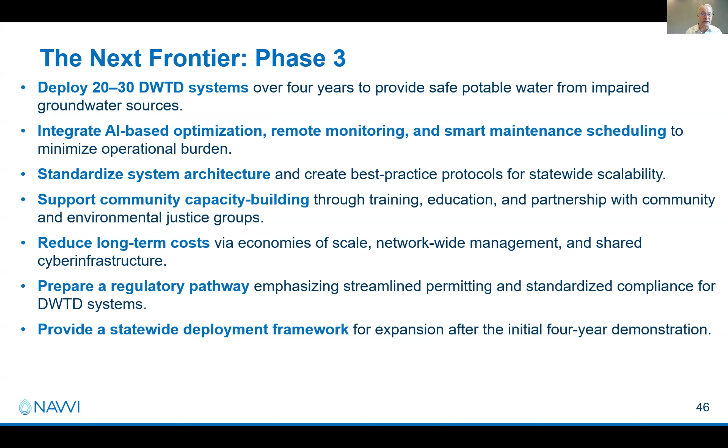And most importantly, solidify a regulatory pathway for this approach to be adopted in other water board districts in California, as well as seeking a way to show other people. So we're currently seeking project partners. We will be looking for project sponsorship. Obviously, Prop 4 funding in California is one thing we're going to be seeking.

Okay, let's take us out. Yoram, why don't you just do the victory lap here?

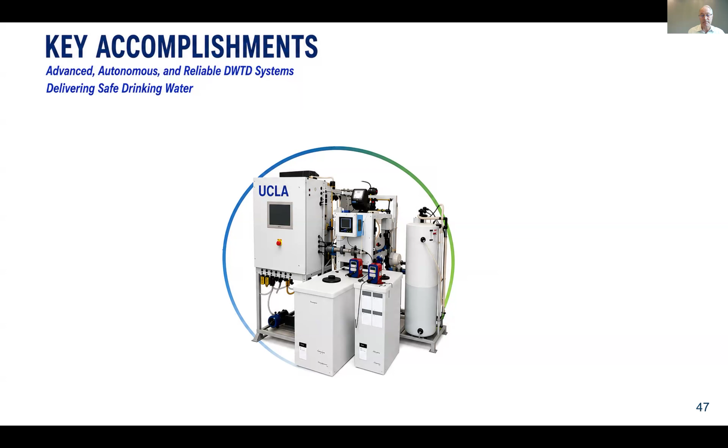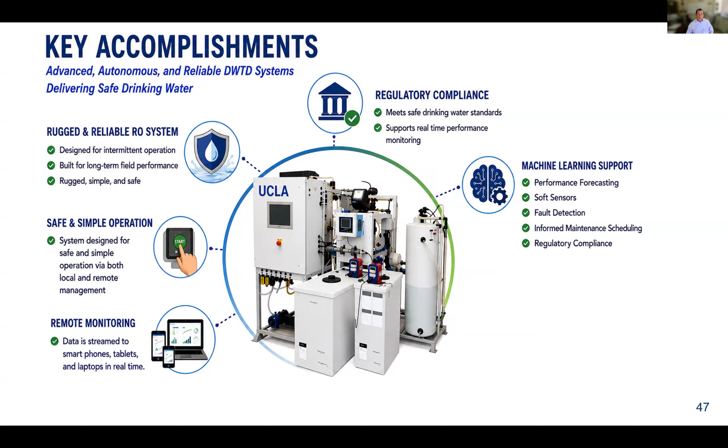Yeah, so rugged, reliable systems that we've talked about, that are simple to operate, remotely monitored. We rely on machine learning support for decision support, fault detection, soft sensors. Regulatory compliance, which is very critical, and of course safe discharge of our residual stream into the septic system.

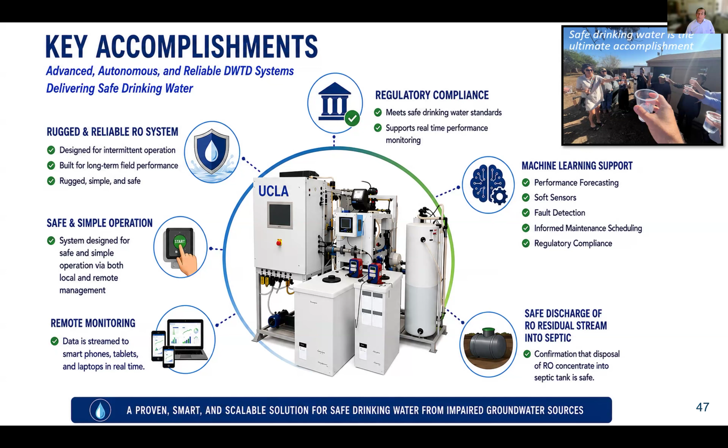Yeah, and what you see at the top here was a drinking party a few months ago, several months ago. We like to drink on this project. Water, that is - clean water.